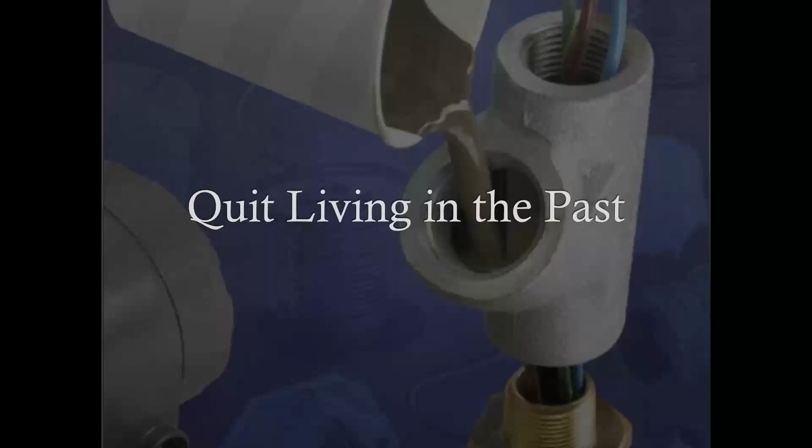So I'm sure some of you have seen what's on the monitor there before, which is what's called a poured seal. Poured seals have been around forever, and those are there to function in explosion-proof applications as gas blocks. And they're still around, they're still used tremendously, but we kind of consider them a thing of the past at Turck. We want you to move into the future of process wiring, which is the purpose of this presentation today, to convey what that future looks like and how it can potentially apply to your products or your applications or your equipment that you're manufacturing or having to support.

So moving on, what is process wiring? Process wiring are quick disconnect products designed specifically for the special need of process automation. And when I say process automation, that can be any kind of process. It could be manufacturing crude oil, or processing crude oil. It could be processing gas. It could be making pharmaceuticals or cosmetics. It can be a variety of different topics. So process wiring fits in all those markets. So hopefully one of those deals with what you're working with on a daily basis.

So the benefits of process wiring, it kind of came from the factory automation world. And anybody that's been in factory automation has dealt with probably M12 quick disconnects, or if you're used to Turck, we call them Eurofast. Those are plugs that make the speed and ease and cost of installation very low, because you can go deploy equipment very quickly on your pieces in the field. It's generally reconfigurable, which means you can unplug things, move it around, plug things back in, replace sensors very quickly. And most of the time it's mistake resistant.

And what we mean by that is, by using pluggable devices all the way from your control panel, it's really hard to mess up wiring. As long as you've got it landed on the right terminal block inside the control panel, you should be good to go 99.9% of the time. There's always that one outlying factor, but it does make it as close to mistake resistant as possible. When you take those attributes and you apply them to process automation, there's even more benefit to it.

A lot of times in process automation, you have to deal with frequent calibrations of equipment. There's maintenance. Things have to be pulled out and replaced and put back in, sometimes because of corrosive environments or things of that nature. A lot of times we're dealing with skids or modular construction. What that means is, let's say you're building a skid on site that has to connect to another. Well, you've got to break that down to ship it, because most times you can't fit one skid on a truck. So this allows you to plug and unplug those devices. So once you do get on site ready to deploy, everything plugs back together. You don't have to spend a lot of time rewiring.

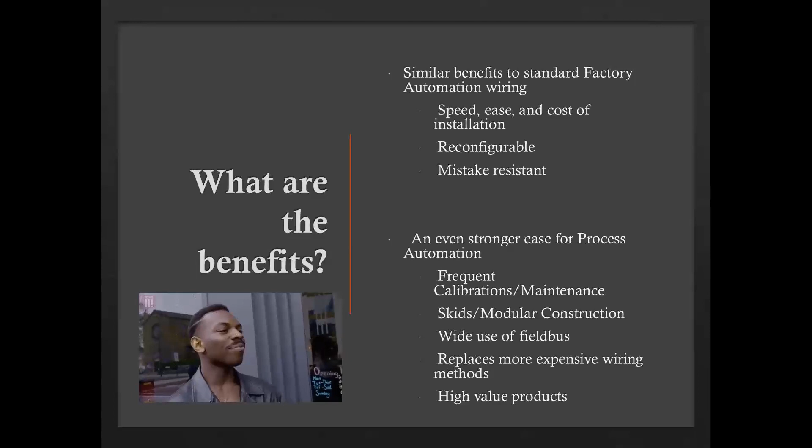Here's just an example of an application that we've had where frequent calibration came into play. This is actually from the Alaska pipeline, and it's an application on a LACT unit. And for those that aren't familiar, LACT is lease automatic custody transfer, or basically the cash register on an oil or a gas pipeline. Well, as you can imagine, that flow meter that's on there, it's got to be calibrated fairly often because people want the right amount of money for the product that they're producing.

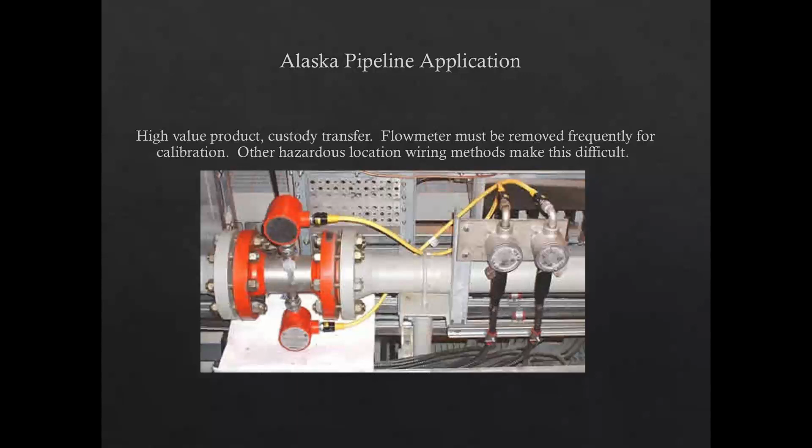Well, to go pull that multiple times, if you didn't use Turck process wiring, that means you have to go break a seal. There's a lot of mechanics involved to take that flow meter out, versus with process wiring, you simply go, make sure your circuit's disconnected, unplug it, put the new calibrated unit in, plug it back up, and you're up and running again. So your downtime is cut down considerably. So that's just a key example of where frequent calibration, your life can be made easy by using Turck process wiring.

So in our world, what are the challenges that make our world special? Obviously, harsh environments. This is a picture I found online. I'm assuming that's something in the... potentially just based on the amount of ice accumulation on the rails there. But that's the world that a lot of us live in, especially on the oil and gas side. Petrochem, you're dealing with events like Hurricane Laura that just came through in Louisiana. That's coming through and wrecking processes.

With Turck process wiring, you're able to get back up and going much, much quicker because of the sealed environment of the connectivity. Since it is pluggable, it's IP67 at a minimum, which means it can be in a meter of water for 30 minutes without any kind of water ingress. We've seen it much longer than that, but it does give you that protection. Obviously, chemical manufacturing has its challenges, pharmaceutical, which I just mentioned, and then water, wastewater, because we all know if water and wastewater isn't functioning, society is quickly going to go into a spiral. So it's key that that stays functioning.

Also, another challenge in our environment is people are wanting to run these networks, Foundation Fieldbus, Ethernet, things of that nature. Well, oftentimes shielding and very high level shielding is required because of the power that's being used by other pieces of equipment around it. So we're able to provide that extra shielding. And then also you've got NEC compliance that you have to adhere to, and then also hazardous areas that you have to take into consideration, Class 1 Div 2, Class 1 Div 1, even some zone ratings if you're going into Europe or throughout the world.

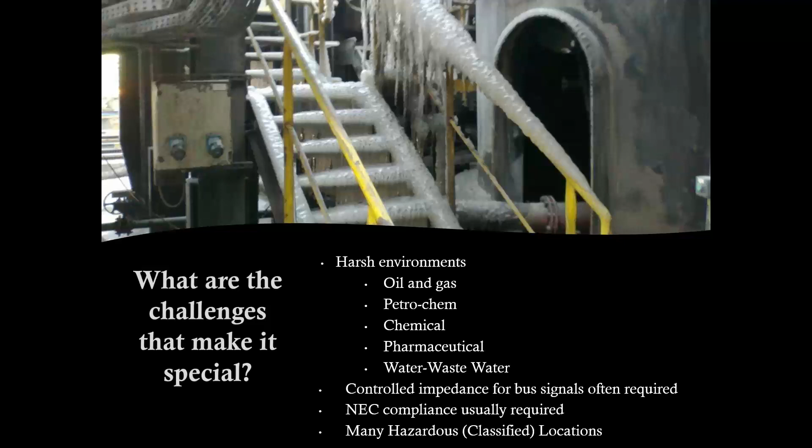So based on that, let's jump into a little bit of NEC. And as exciting as code is, it is important to talk about this. So NEC compliance for Class 1 Division 2 areas. So telling a little story, in 1996, the NEC... instrument tray cable, or you may have heard the term ITC before. Since 1996, they've actually expanded how you can use ITC cable as a Division 2 wiring method. So what Turck did is Turck took the concept of ITC cable, coupled it with our quick disconnect product offering, got certifications, and really revolutionized the wiring for hazardous areas.

So building on that, nearly all process installations are subject to the National Electrical Code. It's just the fact of the matter. Most of the time, circuits must be wired with approved methods. All wiring media has to be rated. Even the raw wire used in conduit has to be rated according to NEC. And circuits that aren't like a Class 2 circuit, and for those that aren't familiar, Class 2 means the circuit is power limited to 100 watts at 24 volt DC. Even circuits that aren't power limited have to use a 600 volt wiring medium. So what that means is even if you're running a 12 volt signal, if it's not a Class 2 circuit, you still have to use 600 volt wiring.

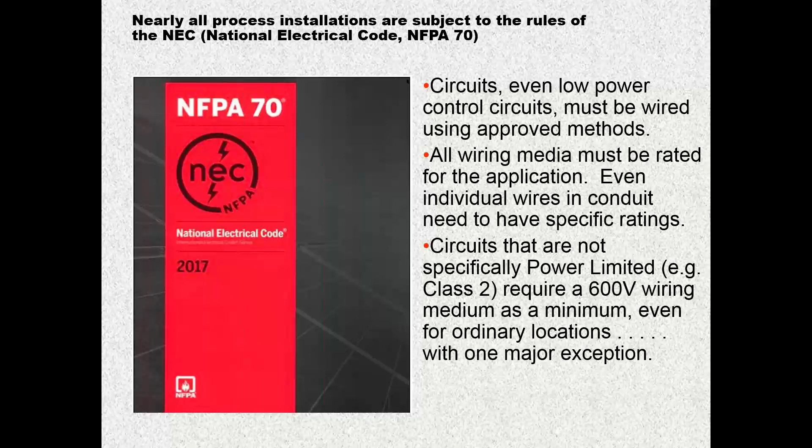Well, Turck, with our one major exception, and that's ITC cable. So what ITC cable is: wiring for instrumentation and control where circuits are less than 150 volts and 5 amps or less. I'm sorry, 5 amps or less of power being utilized.

They can be used in cable tray. ITC cable can be used in raceways. There's armored ITC cable, which we're going to talk about here in just a second. There's also what's called exposed run ITC cable. You may have seen it designated as ITC ER previously. What that cable allows you to do is actually drop out of your tray up to 50 feet down to a device or a switch or whatever it is you're trying to route down to.

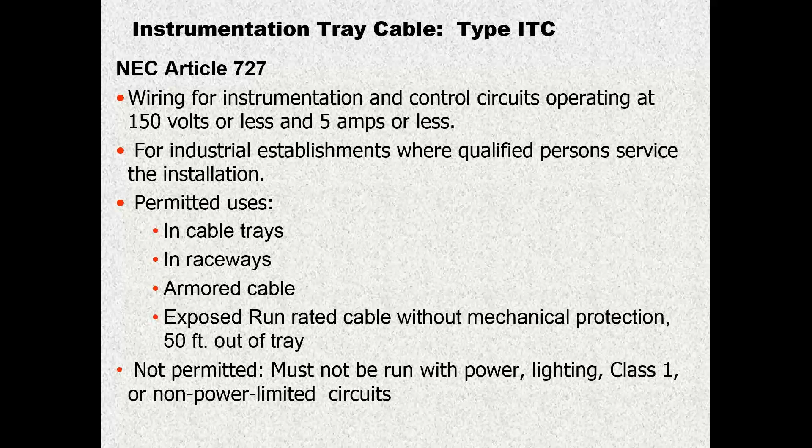The key caveat here is with ITC rated cable, you cannot run power circuits, you cannot run lighting. Caveat is with ITC cable, that is a requirement. So just looking here, here's the 3 examples, and we're going to delve into each one individually of the different types of ITC cable that's going to be available to you.

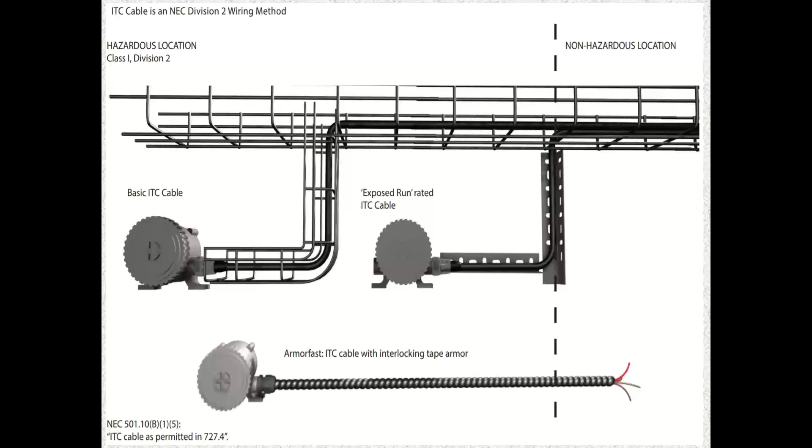The first is our standard ITC cable. This is going to be something where you have to run the cable in tray all the way down to your instrument or your device. It definitely makes life easier than having to run rigid conduit and deal with poured seals, obviously. But key is that tray does have to be taken all the way down to the instrument housing itself.

The next generation of that was what I mentioned, which was ITC ER rated cable. So with the ITC ER, now you can run it in tray, but then whenever you get ready to drop down to your transmitter, you can run it in some angle iron, something to mechanically protect the cable down to your transmitter. So it doesn't have to be tray. It can be other types of mechanical protection, and you can take that out up to 50 feet from the tray down to your transmitter or your device.

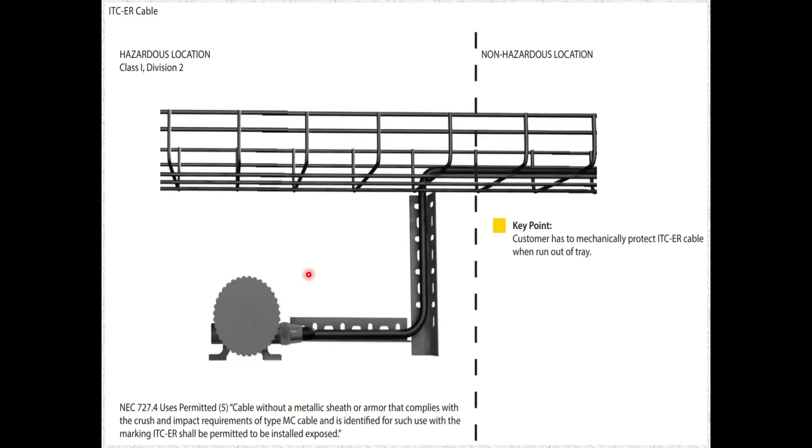And here's an example of what that could look like potentially within a process installation where you've got some angle iron run and it's tied off and supported every 6 feet down to the transmitter in that case.

Hey, Kurt. Yeah. I got a quick question here regarding ITC cable, and maybe you're going to get to this, but the question is, can we use 4 amps and 24 volt DC power with ITC cable? Yeah, in those situations you can, as long as it's under the 150 volt and the 5 amp regulation. So we have seen some applications where you'll have lower power actuators, for instance, where they'll need multiple wires going out to them, but they're very low power. So you can have the power on there plus your low power control signals as well.

Thank you. All right, I'll assume that was it. I'll move on.

So ITC ER cable is a very high spec cable. Basic ITC is still a premium cable. It's got more restrictions than the ER version, and most cables now, especially that Turck has to offer, are going to carry the ER rating on them as well. So within the ITC ER cable, the crush and impact resistance requirements are going to be extremely high and difficult to meet, especially for an unarmored cable.

But the testing they have to go through in order to get that ITC ER rated marking is that the cable is crushed 10 times between a flat plate and a 3/4 inch rod, and the average force to produce an electrical short must exceed 1,000 pounds. So a lot of times in my career, people are really worried about cables being stepped on. Well, using an ITC ER rated cable, that concern pretty much goes out the window.

We've even had applications where we've had ITC ER cables strung across a frac site and had skids actually sat on our multi-conductor panel. Didn't realize it, ran the frac job, lifted the skids off, coiled the cable back up, went to the next job, and it worked fine. So it's a very, very rugged cable.

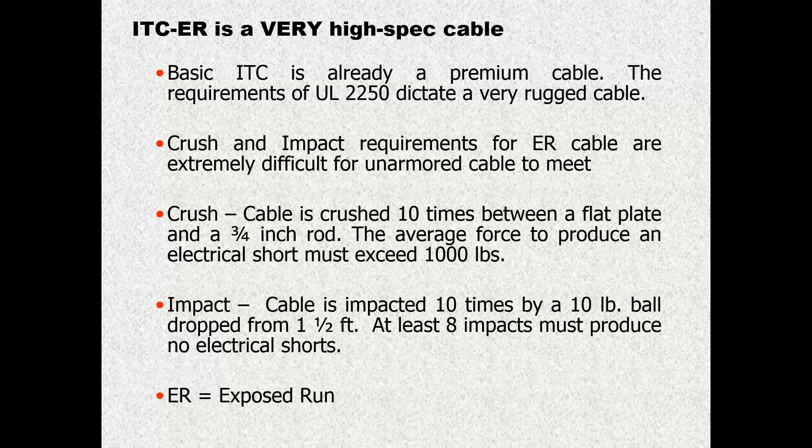For impact, it has to withstand a drop of a 10-pound ball 10 times from 1.5 feet. And out of those 10 times, at least 8 of those times, a short cannot be caused. So that just gives you an idea of the impact testing that it's got to go through as well. So a very rugged cable. But really, the biggest feature of this is it provides flexibility down to the last foot.

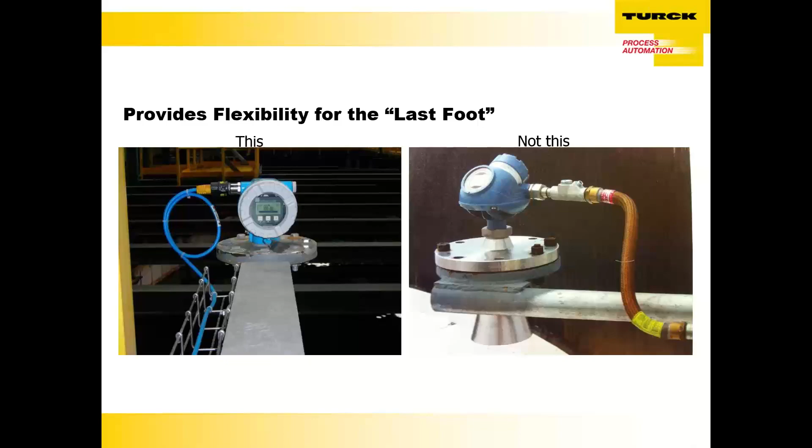So the one other type of ITC-ER cable we mentioned briefly was an armored version. The nice thing about the armored cable is you just have to mechanically support it every 6 feet out to your devices. Other than that, no tray requirements, no mechanical protection requirements. Obviously, you've got the armor on there. You just got to support it every 6 feet.

The one downfall to it is this cable can be very heavy, the more of it you have on a spool, for instance. The other thing is it's not really made to be spooled and unspooled, spooled and unspooled. So that can be an issue if you do have temporary installations on this guy. If you've got a fixed installation and you don't want to run tray or any kind of mechanical protection, this is definitely a viable option. We have a variety of different cord sets that have this type of mechanical protection in it also.

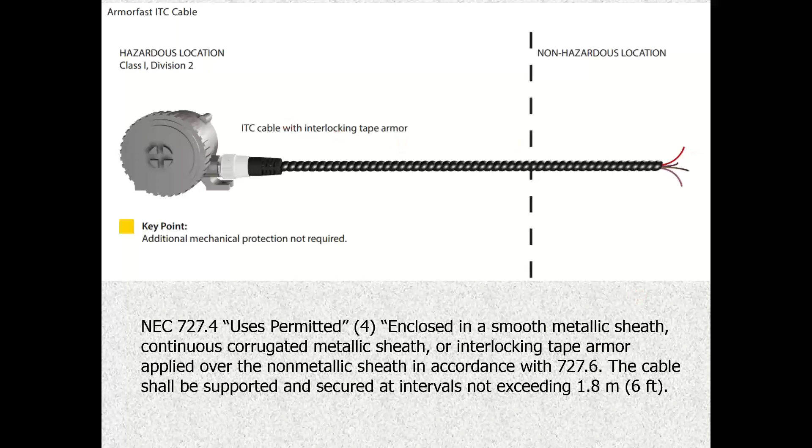So great, the ITC-ER cable is great. We've got a lot of different options, but we want to take it a step further. We want to go add what we call one of our receptacles to the device. So this is an example right here on the camera, if you can see it, of a 4-pin receptacle. It has a 1/2 inch NPT on the back of it. This is made to be added to a non-incendive transmitter or switch, whatever you may have out here. You're going to screw that guy in, and you're going to plug in your ITC cord set.

What this means now is if this guy has to be calibrated in the field, or has to be pulled out for a mechanical reason, whatever that may be, it's as simple as unplugging it, putting a new transmitter back on, plugging it back in. It does not take a certified electrician to go and swap these out now, be it in a pharmaceutical plant or even out on a wellhead. You can send anybody out there to swap those out for you.

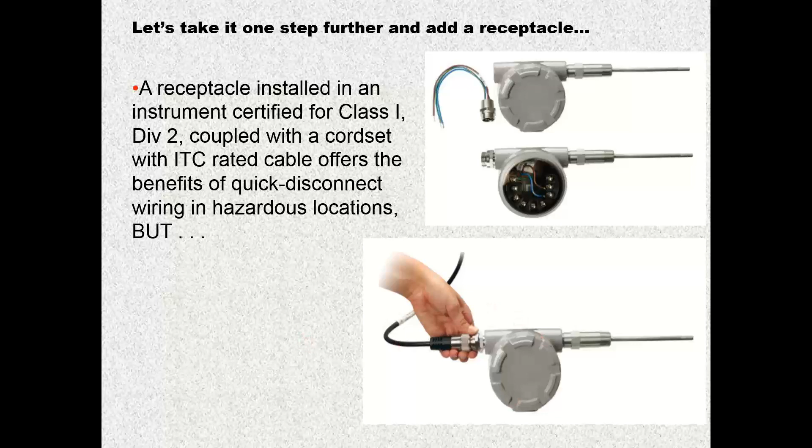The one key caveat is, for those that aren't aware, Class 1 Division 2 means a hazard should not be present under normal operating conditions. But what we all know is under non-normal operating conditions, a hazard could be present. Well, if you're allowed to simply disconnect this at any time as a hot circuit, you could potentially arc across those contacts. And if you did so, and gas just so happened to be present, you could have a major issue at that point. So what Turck has to keep that from happening is our LockFast device.

A tool to remove a protection device before unplugging has to be used in a Class 1 Div 2 area. So by adding this on and snapping it around the connector, it's there to force the technician to be reminded, hey, I need to go kill power to this circuit before I pop this guy off, right? And you can see on here, there's actually a label that shows it. And the LockFast is a very simple device. It's a clamshell. It's made to just go right there.

And one of the questions I always get is, hey, if I take this off, we're just going to find them in the dirt. We do offer these now with a lanyard on them. So you can go and add a lanyard behind this guy. So if this is taken off, it can hang from the transmitter while you're swapping or doing whatever it is you need to do, calibrating, whatever that may be.

Hey, Kurt. Yep. So quick question. Somebody was asking if the plug also works as a secondary seal from the process for temperature elements. Is that correct? We'll have to circle back on that one. I've never been asked that question. I guess I need a little more clarification. Can you notate down where the question came from, and we can dig back into that a little bit?

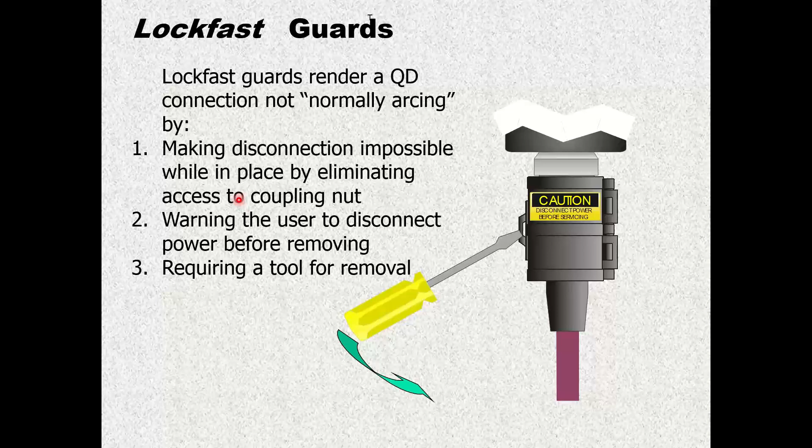All right, so just an example here of what a lock fast would look like. Again, it makes disconnection impossible on there, warns the user to disconnect power before removing. And you'll see actually from this next picture, here's an example of one right here. It says, caution, do not disconnect when circuit is live.

If you've got your readers on or your glasses, you can actually see right here, we reference our FM control drawings specific to that. So where that's key is if you get an inspector in your plant or on your well site, and they're saying, well, I've never seen this stuff before, not sure how it works, if you're meeting code. This references directly to our control drawing, which shows how these can be implemented in the hazardous area in a safe manner. So you do have that protection there for you as well.

If you need help finding that certification documentation, please contact your local distributor or Automated Dynamics guy, and we can help you find that documentation.

Quick disconnect solution from Turck is, being that this is a molded connection over here, you do not need a boundary seal now when transferring from a Class 1 Division 2 area into a non-hazardous location. So where that's beneficial is, typically in the past, you would have to have a poured seal here at your transmitter housing to keep gas migration from going into the transmitter. You would also have to have a boundary seal here going into the non-hazardous location to keep gas from flowing potentially into your main control.

Sheathed cable and a molded body here, that is no longer required. So that's just another added benefit to using Turck's system and cut down on the amount of labor that it takes to have installations stay up and going.

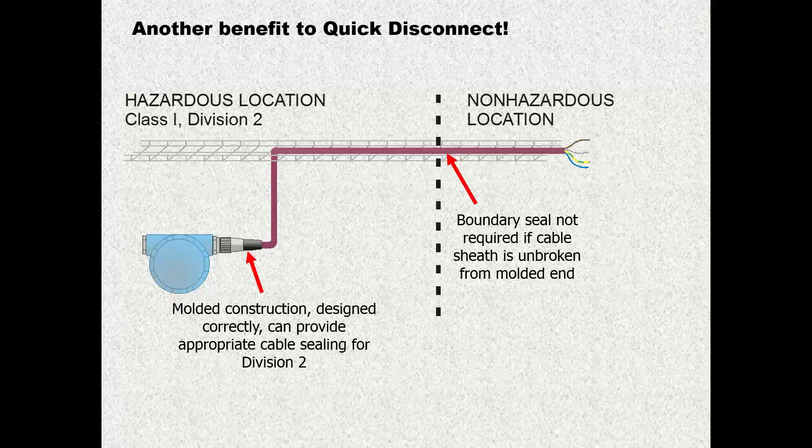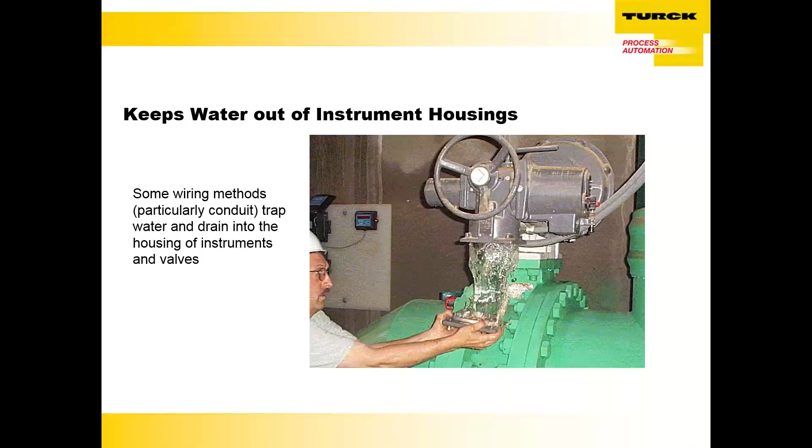So we've actually taken it one step further, and I know we're on to probably step 7 now from what I've said. I guess I've introduced what we call an explosion-proof feed-through. So this is actually made for transmitters, or switches, that get their rating for Class 1 Division 2 by being an explosion-proof device. So you've got two different types. You've got a non-incendive type transmitter, which doesn't require this type of receptacle. It can use one of our standards. Or you have an explosion-proof transmitter or switch where the housing is what gives it its approval for the hazard.

A receptacle that's potted to the point to be able to withstand the pressure from a potential explosion within your transmitter housing. And then as that explosion occurs and the gases are outgassed out the housing, it cools as it goes across the threads leaving the housing. So the key from this is it's not an explosion-proof connector. This does not allow you to disconnect hot still. You still have to kill power to the circuit before you unplug these transmitters. The key is it seals up your explosion-proof housing to retain the EX rating in that Class 1 Division 2 area, but now it is considered pluggable. Okay, so hopefully that makes sense. If not, we can get back into the weeds on it and hook up with one of your local guys. But it is made to seal up and keep your explosion-proof device.

Hey, Kurt? Yep. Got a question here about, does it provide H2O intrusion protection? Which I believe that's a yes. On the threads or on the actual connector portion itself? How about both? Yeah, it should. I mean, obviously on the connector portion where the plug is occurring from the cord set, yes, it does. As long as you seal your housing up correctly, just like you would with an EX plug or anything on the other ports, yes, it will provide that protection. Thank you.

And somebody's asking here, and I think the answer is yes, that what you're talking about right now with the explosion proof, that's what's called out by the EX in the receptacle part number, correct? 100%. Yep, that is exactly right. If you have one of our receptacles and it has an EX in the part number, it is one of the explosion proof feed throughs.

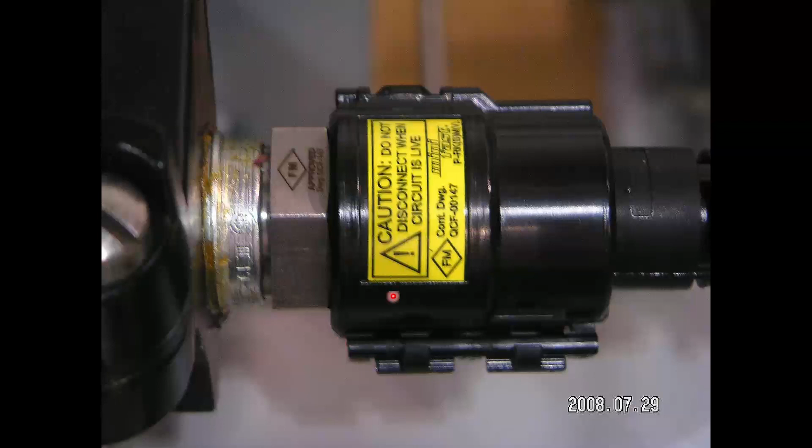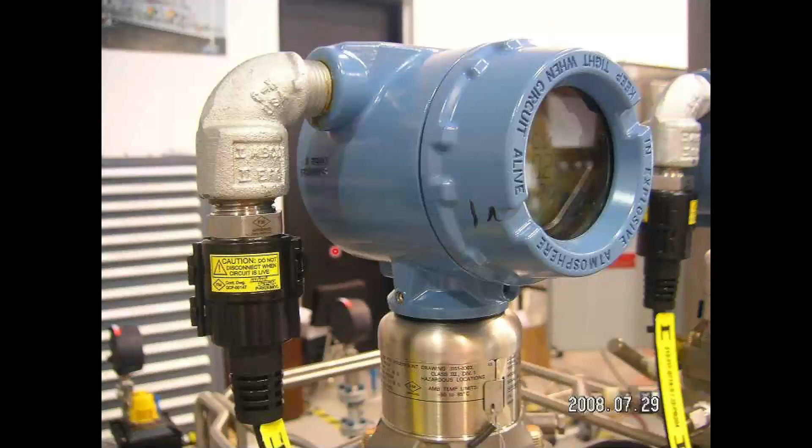And here's another example of it. This is an older picture from 2008. They put this elbow here. We do have right angle cord sets now that can plug this in and eliminate the need to put this elbow on there, just for your knowledge. Some of the applications, as I mentioned, explosion-proof limit switches, you can now make these pluggable. Limit switches wear out. It's just the nature of the beast. They do. They're mechanical. Very easy. Your transmitters, as we talked about.

And then one thing I've actually done with a few customers is they've got a NEMA 7 box, which is explosion-proof, but they'll have IS barriers inside here. Well, for those that are familiar with intrinsic safety, it's power limited. So those circuits can be plugged and unplugged hot, because even if you arc across the contacts when you plug or unplug, there's not enough power there to blow the atmosphere.

So what they'll do is they'll have a NEMA 7 box, IS barriers inside here, and then you now make those IS circuits pluggable. So again, a quick way, instead of having to have a bunch of glands on the bottom of here, and then you got to coil a bunch of cable up, you don't have to do that anymore. Now these can be pluggable if you're using intrinsic safety. And if you'd like more information on intrinsic safety, that is going to be one of the questions in the survey, as another topic for us to present on.

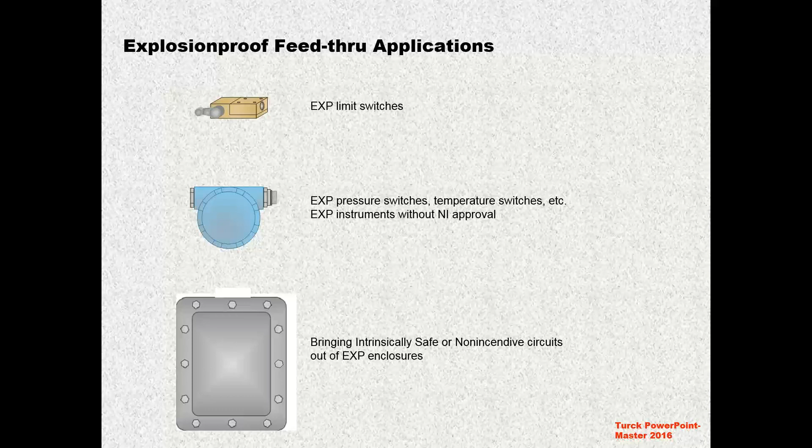Hey, Kurt, quick question. Yep. Yeah, so kind of back to, I think, even using the lock fast, there's a question about the need to kill power. The question is, if a person were to verify the area is safe and no hazards are present, it could then be unplugged in a Class 1 Div 2 area without shutting off the power. Is that correct?

That's going to be more at the discretion of the producer or the operator at that point. All of our documentation calls out killing power to the circuit, and all of the verbiage that we call out has to do with disconnecting power to the circuit. So if you wanted to stay within the realm of the Turck documentation, you know, if that producer or operator wants to make the choice to allow for a sniff of the area, that'd be up to them. Got it.

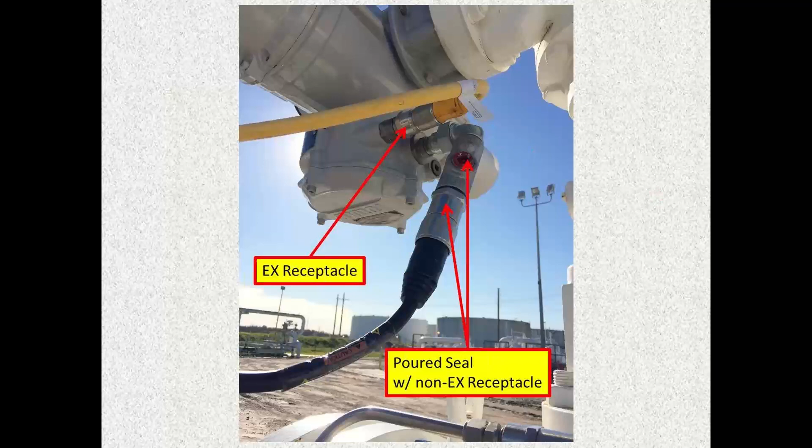And then just here's an example of old and new technology. So the older poured seals versions versus using Turck's connectivity. You can see mechanically much smaller footprint, so potentially smaller panels depending on what you're wanting to accomplish. So for those that aren't familiar with our product offering, these are Class 1 division.

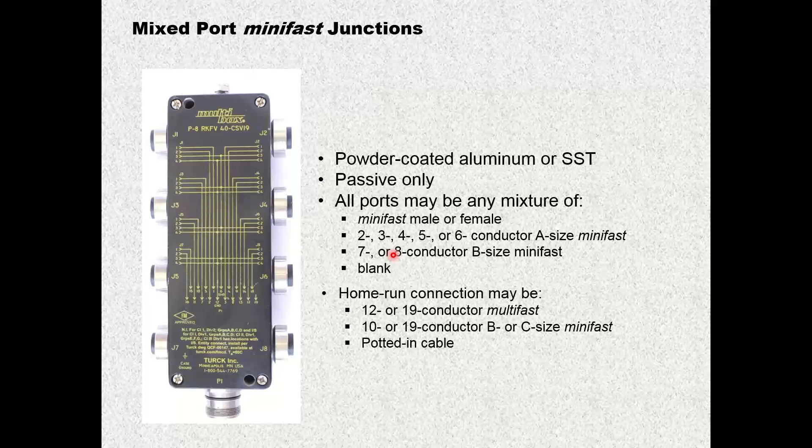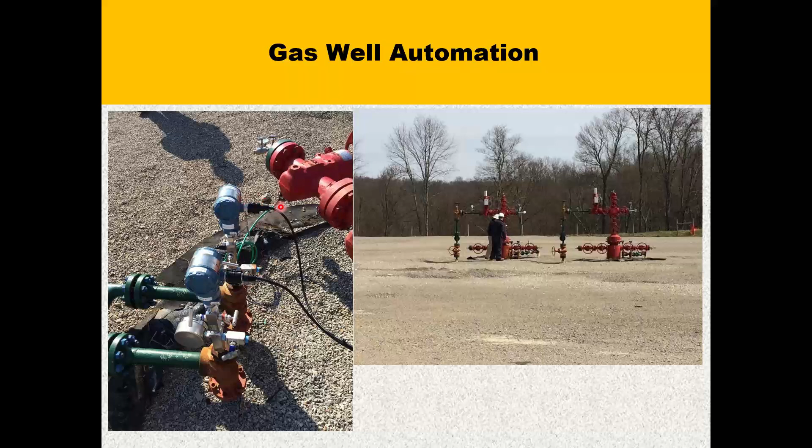This is some gas well automation that we've seen. So you can see over here, we've got a couple of pressure transmitters where we're picking up values. They've got 4-pin cables on those that are running back to a brick on these guys. So in this case, they're using 5 of the 8 ports. You can see the caps that are on here closing off the others. They do come with plastic caps in the box. If you want to add metal, you can. But you can see back to your main RTU or whatever it may be on the side of the well pad.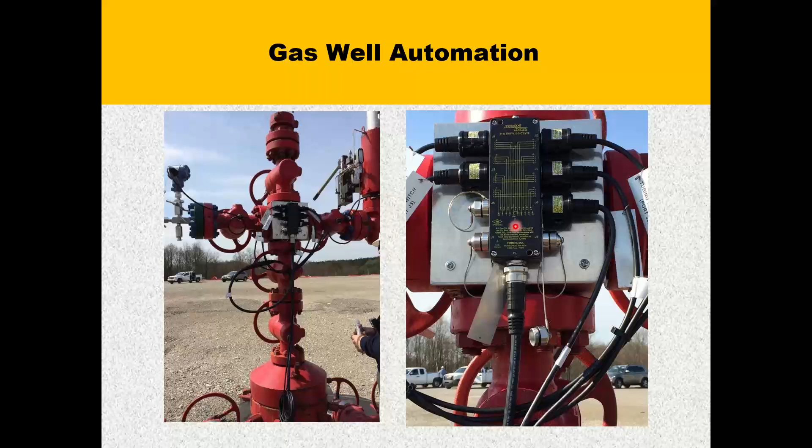Here's another example of what was done on a wellhead where they had multiple devices. Again, plunger arrival, pressure. I believe even the ESD was wired into these guys. And this is a little bit unique and a little outside the box, because what was happening is workover rigs were coming in and pulling this wellhead, and they were just cutting all the cables and throwing it to the side. And so whenever they had to go reassemble the well, it took a...

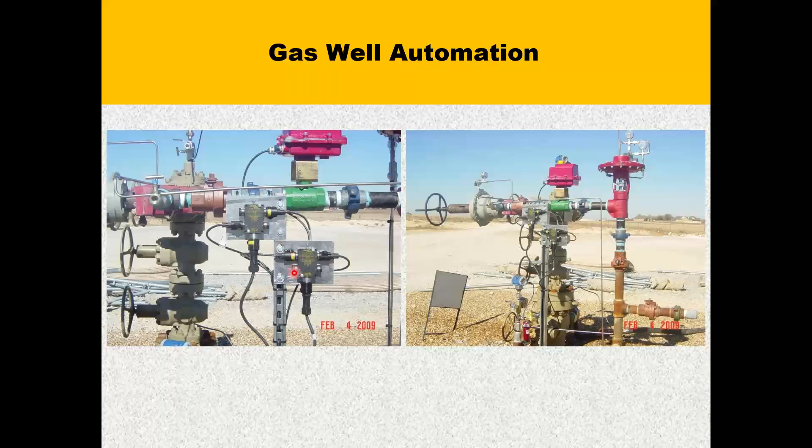Now there's magnets on these junction bricks and this steel plate. So whenever they go to work over the well, they simply pull these bricks off, unplug everything, work it over, and then to reassemble, they just mechanically mount everything, plug everything back in, and they're up and going. So just a quick way to get these junction boxes out of the way and then get them back up on the wellhead.

Hey, Kurt. Yeah. A quick question, I guess, back on the junction boxes. If you've got those closure caps on there, do they need to have any kind of a snap lock on them? I guess that all depends if there's power on those pins or something. Yeah, the only time you have to have it is whenever you're disconnecting on these guys. As you're pulling that out, you can see you've got your male pins on your receptacle and then your female contacts. Well, whenever that's disconnecting and you're taking those contacts apart, that's where you could potentially arc. On the closure caps, they're just screwed over the overall housing, so there's no contact with the live pins on that. So no, you don't have to have anything on those.

Perfect, thank you. So what we've got here, this picture is actually the bottom of a control panel. They've actually got a bulkhead plate, 2-pin home run bulkheads mounted. Slapped this on the bottom, wired it up internally, and then now all their home run cables from their junction bricks just plug directly in. So again, just ways to speed things up, ways to make life simpler when it comes to wiring of control signals, because as things progress, people want more and more information. They want more and more process values. So this is just a very simple way to help give them that without just adding a multitude of wires to your panel.

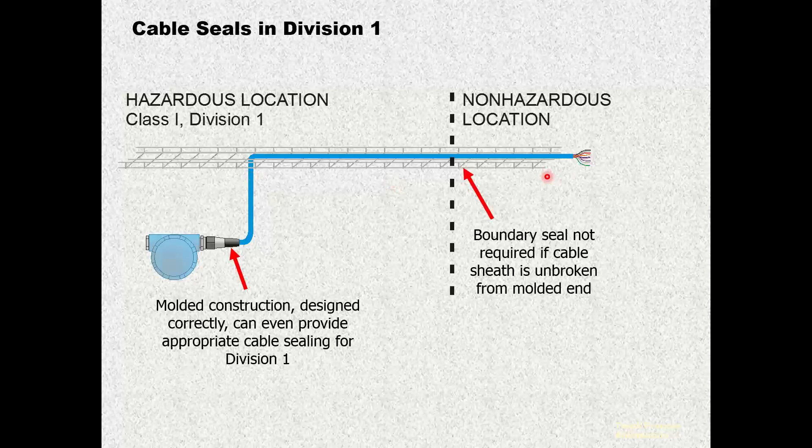So one of the other benefits to this guy is in a Class 1 Div 1 area, which is what we're showing here, as long as you're going intrinsic safety, right? You don't need a boundary seal going from a Class 1 Div 1 area to a non-hazardous location. So the benefit there is you're going from where a hazard is always present because it's Div 1 to an area where there should not ever be anything, and you don't have to do anything special to traverse from one to the other. So that's what this is showing.

And as I mentioned, if you're using IS circuits, you can use our multi-port bricks. So now you can gather in your proxes, pressure transmitters, temperature values if you're using RTDs, and take those back to IS barriers on this side. So now you can go into the Class 1 Div 1 area and still have the same wiring process.

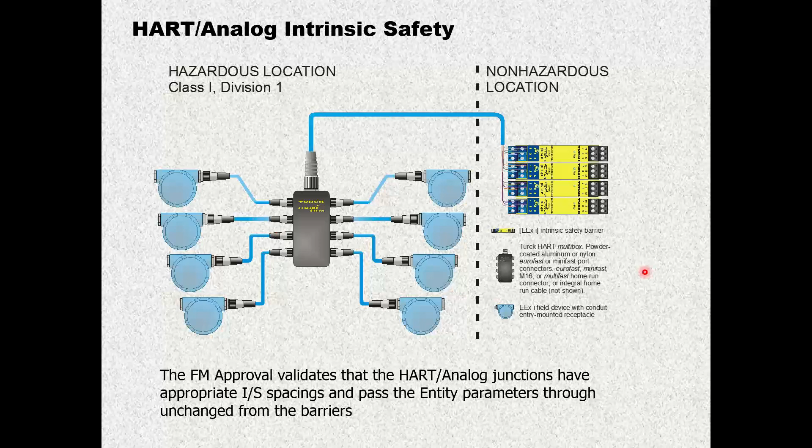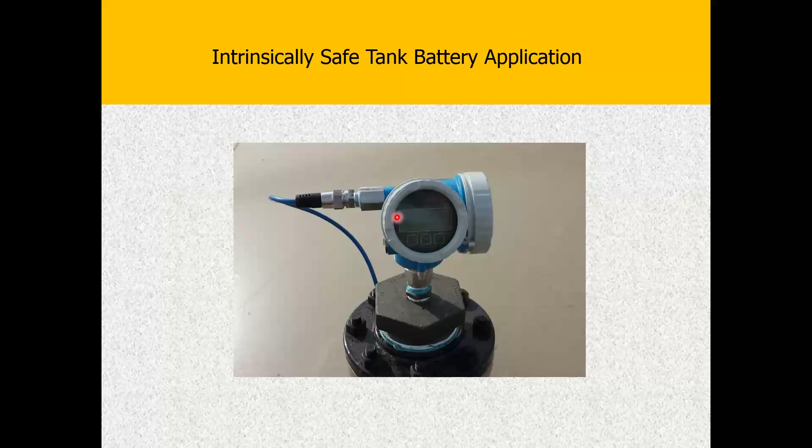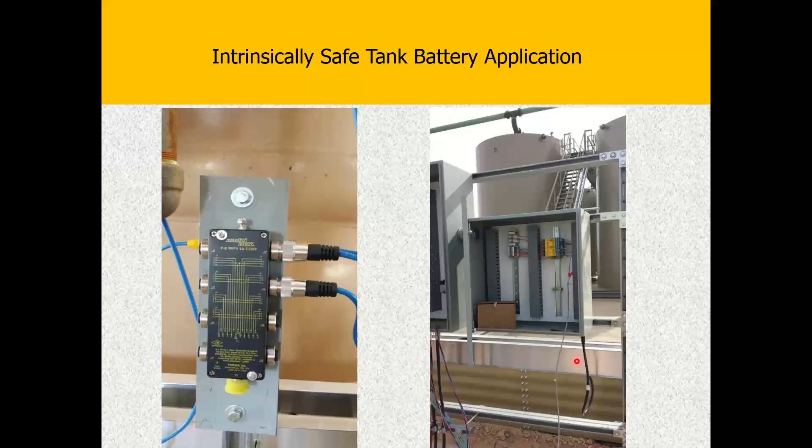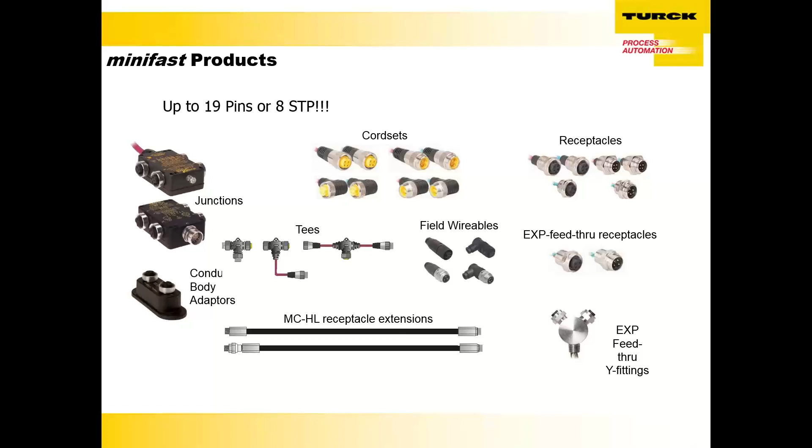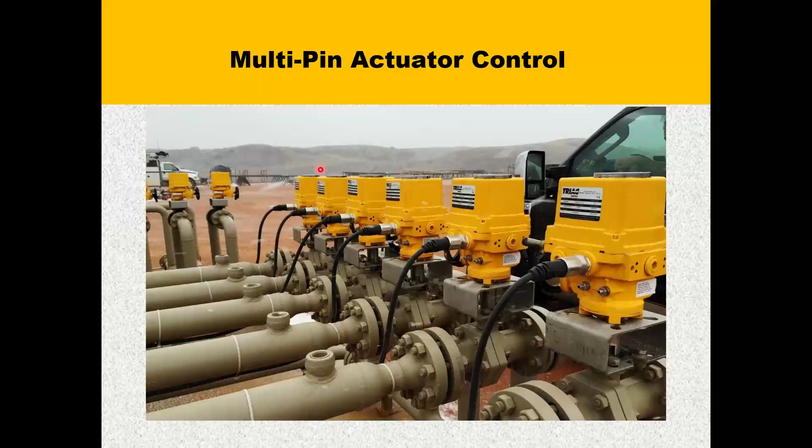This is just a bank or a battery of actuators where they're using some multi-pin Turck receptacles on there for control and power, turning these guys. But this is the beauty of it: this panel showed up on site, all of these actuators pre-wired on there, so all they had to do once it's mechanically mounted is plug and play, and they were off to the races.

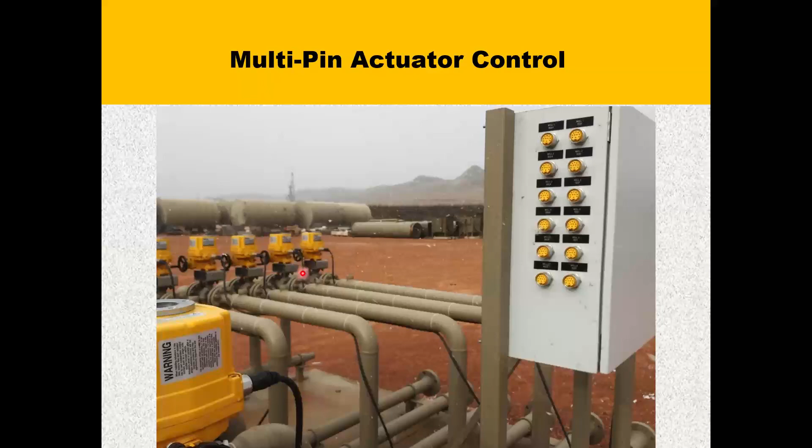Contradicting myself here just a little bit, and if my wife was on here, she'd say I do it all the time, but we do have a power option. I know previously I said you can't run power circuits, and that was true because that was for instrument tray cable, which is designed for instruments. This is what we call our Powerfast offering.

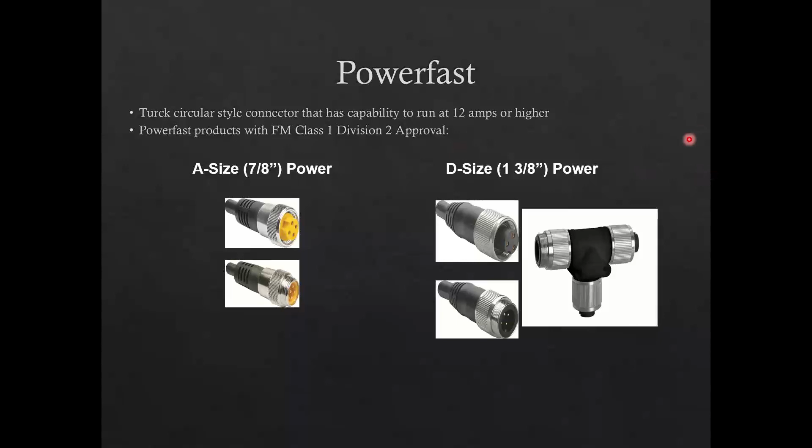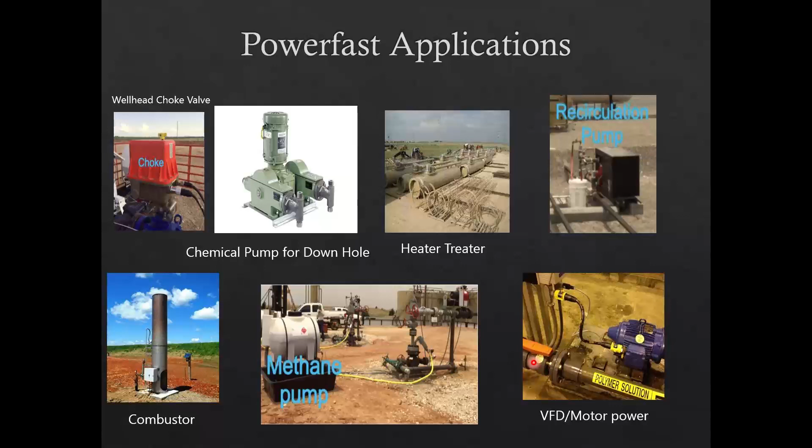These are for power applications, and we use what's called tray cable, not instrument tray cable, but just tray cable in this case. We're going to have an A-size power, which is going to be similar to our A-size signal connectivity. Then we're going to have a D-size, which is actually 1 3/8 on this. Some typical applications for Powerfast are going to be on some choke valves, a lot of different pump applications, even if you got explosion-proof motors and VFD connections. I'm going to show you something unique here in just a second that you can use for that application.

But on our A size, you can get up to a 14 gauge, up to 15 amps, 600 volts, tray rated ER. So tray rated cable, exposed run on these guys. It's going to carry a Class 1 Division 2 approval on it. You can do nickel, brass, or stainless.

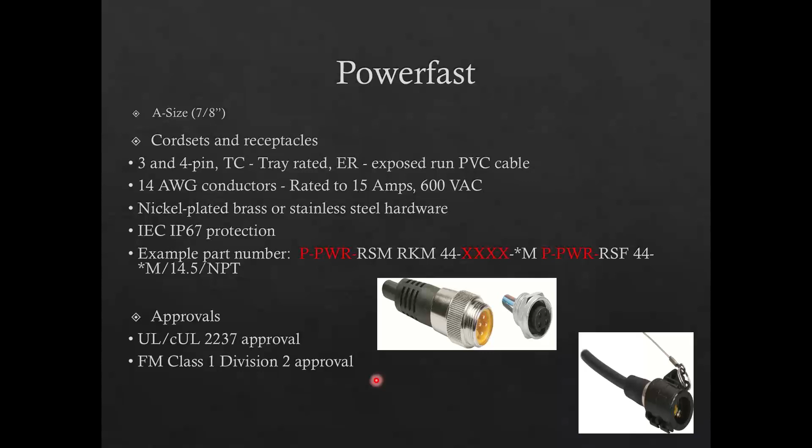And then we'll bump to our D size after that, which is our 1 3/8 size. This guy, if you go to our 3-pin 10 gauge, you can actually get up to 30 amps across that line in a Class 1 Div 2 area. Nickel, brass, aluminum, or stainless, depending on the connector. I typically don't recommend aluminum just because it's soft. Stainless is where we live most of the time.

You can see your approvals for sealing on this guy. We do T's for it. Where these T's are nice is if you've got a bus of power and you want to drop off to different motors, maybe you've got some low power DC motors that you want to run off of these guys, like on a conveyor system in a hazardous area, you can do something like that. And again, these are going to have the lock fast just like anything else. To remind you, you'll definitely need to go kill power to that circuit before removing.

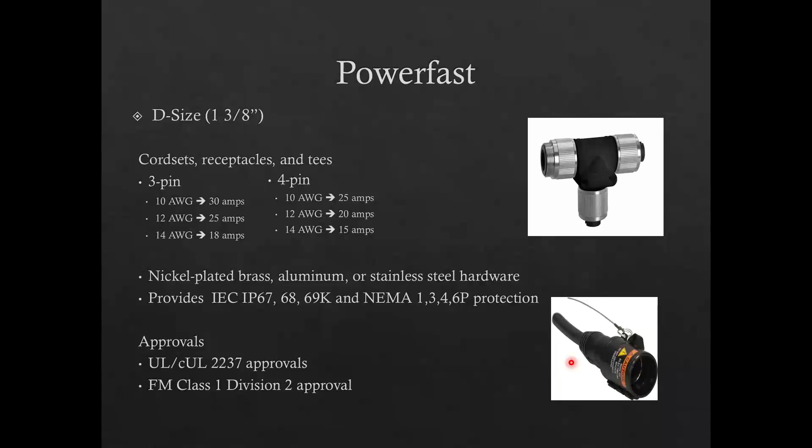Here's an example of where it's used on a Rotork actuator where it exceeded the amperage limitations of our standard cabling. You're going to have your power connection here for your actuators. A lot of times these are going to be 3/4 inch NPT, which we can completely support. And then you've got your signal connection over here on the other port. So your open and close commands, your feedback for open and closed on this cable. This is a very prevalent application that we've run into more and more because of the ease of wiring on these guys, especially in the Div 2 area.

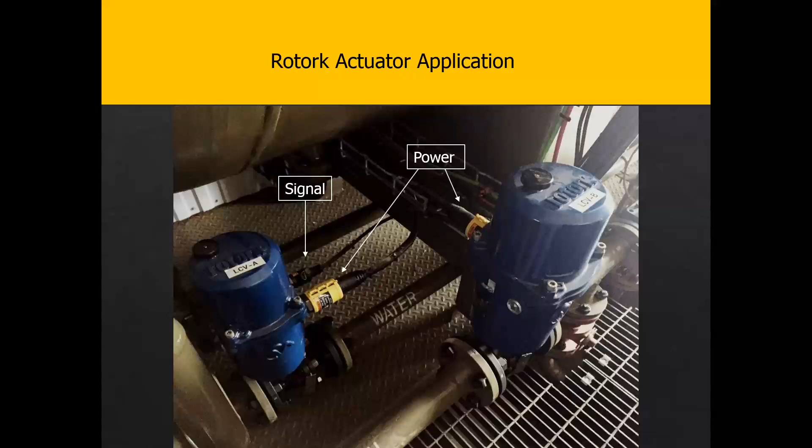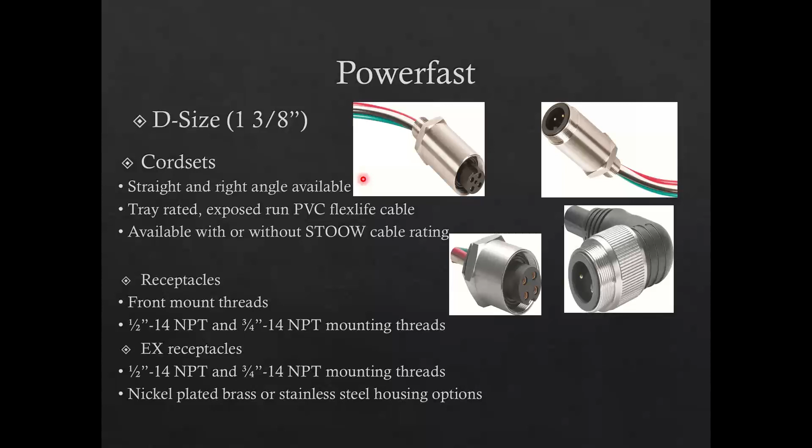So you can see for our cord sets, we can even do a right angle on the D size. The other unique thing for the D size as well is we can do explosion proof feed through versions, just like on our signal connectivity. So now you've got an explosion proof motor that's got to be pulled out periodically to have the bearings done. You're in a corrosive environment, it's going to have to be pulled out every once in a while. Now you can make those motors pluggable as long as they're below 30 amps and make that swap out very easy and get your process back up and going very quick.

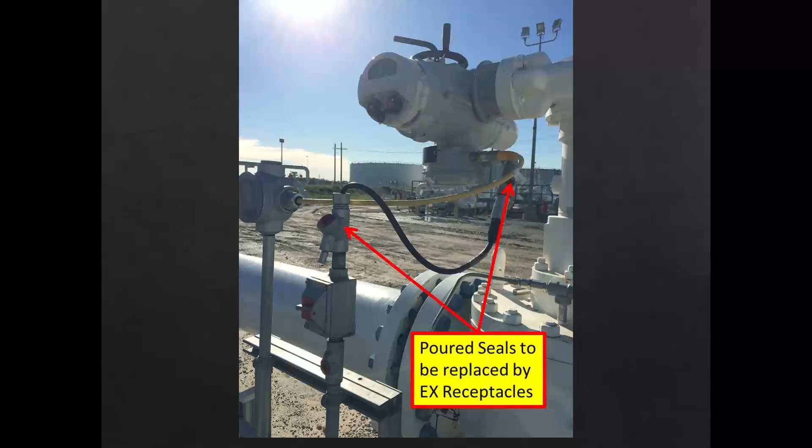A product that I wanted to make sure and point out to y'all that's now Class 1 Div 2 approved: a lot of times we run into solenoid applications where the solenoid is going to have an internal thread of like a 1/2 inch, and then there's going to be a couple wires coming out because this thing's Class 1 Div 2, so it's totally potted. Previously, if you wanted to make these pluggable, you'd have to add a conduit housing and then add a receptacle, butt splice them. Just a pain.

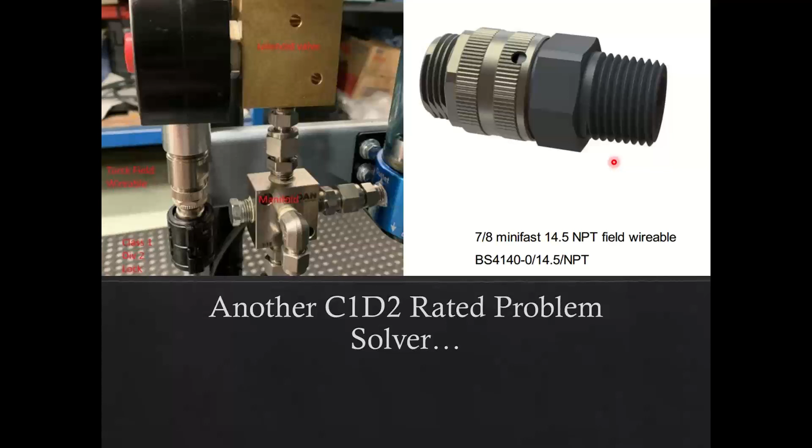Well, now Turck's come out with this guy where this back portion can be threaded into the solenoid housing. You pull the wires through that guy and then land them on this field wireable. So now this has become a pluggable item. Very simply, you got rid of the conduit body and all that extra labor. It's a way to make solenoids quick disconnect, and even some limit switches that are potted, quick disconnect very easily.

Another issue that Turck confronted that we developed product for is the ability to make a quick disconnect in a C1D2 area. This is actually going to be a thermocouple receptacle with all the necessary wiring parameters for thermocouple wiring, no dissimilar metals.

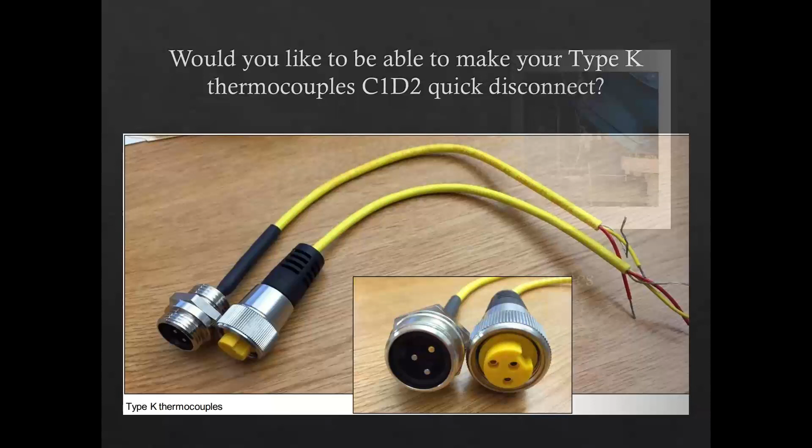This is some of them installed, so you can see you've got your traditional housing here with your thermocouple going in. Normally in the past, you'd have to run thermocouple wire into this guy through a gland or something along those lines, land it on the terminal strip. Well, now with our receptacles, you can screw that into that 1/2 inch NPT, land them on the terminals, and now these are pluggable items. So this makes swap out of those very easy.

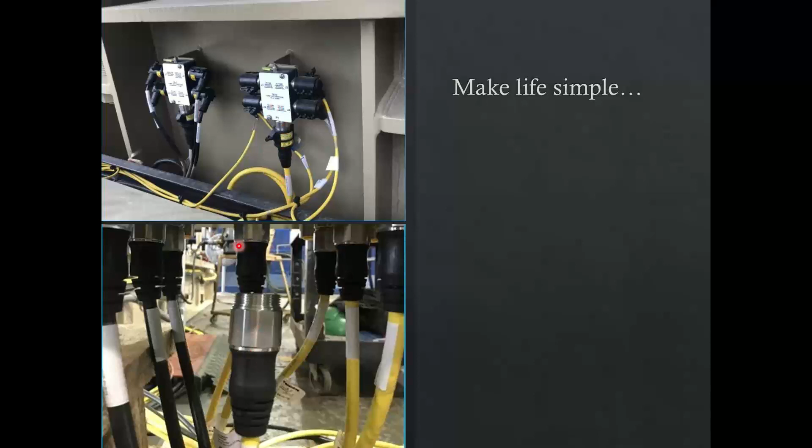And again, I'm a simple man. We like to make life simple. This shows a 4-port. You can actually take in up to 5 different thermocouples into one of these guys, run that back to your main control panel, and plug those in. That's all it takes.

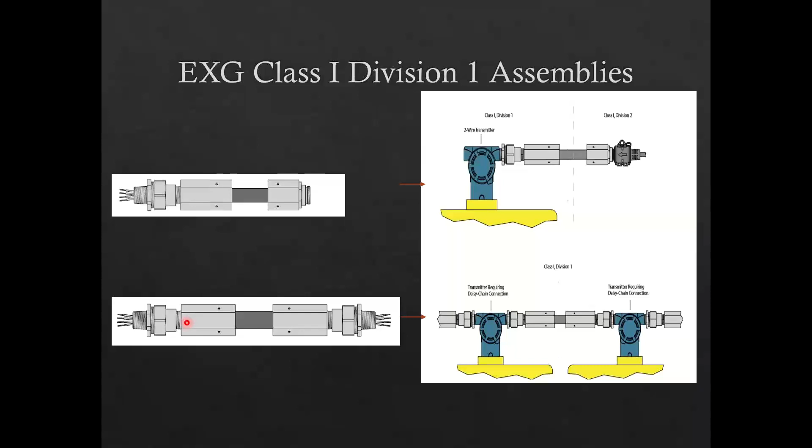If you've ever seen an Okonite cable that's got the corrugated metal all the way around it, this was an MCHL cable. This was the type of cable that you had to use in a Class 1 Div 1 area. It's very tough to work with. It doesn't bend well. If you cut it, it's very sharp when you're working with it. So Turck developed a cable that meets the same specs that's non-armored. So this is that cable, and you can see the pliability of this guy now in a Class 1 Div 1 area.

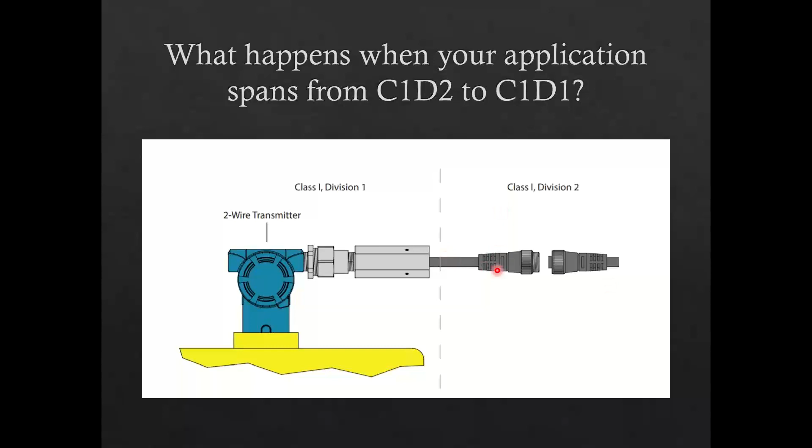So you can do a couple different things. You can either extend from a Class 1 Division 2 into a Class 1 Division 1 area. This is a poured seal that we've already done for you. This is a rotary union that screws in here. So now you can screw that into your transmitter, wire it up. We build this as long as you want to extend into the Class 1 Div 2 area, and then you use our standard connectivity at that point to extend back to your control panel.

The other option with this is if you want to go, for instance, from transmitter to transmitter or explosion-proof housing to explosion-proof housing, we can provide it with 2 poured seals on it. We build the cable in between as long as you want, and then it's got the 2 rotary unions on this guy as well. So a Class 1 Division 1 wiring method that's not your traditional Okonite, you know, go beat your head against the wall trying to bend the stuff and get it where you want it to go. We can make it very easy.

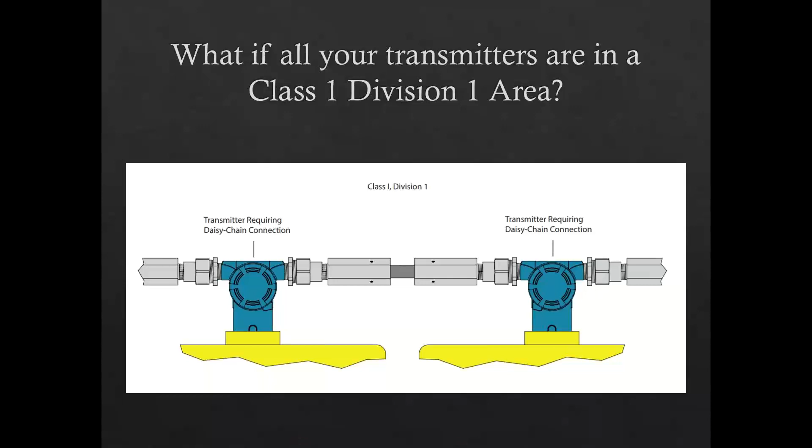The key to it is, find my mouse here. If you read it for an NEC Zone 1, 505, it allows it without any kind of special restriction to use that cable. For NEC 500, which is going to be the Division 1 certification, it calls out where flexibility is required. Again, that's NEC being a little vague. So if there's a reason you need this pliability for your installation, then according to NEC, you're good in the Class 1 Division 1 area. Just want to make sure and point that out.

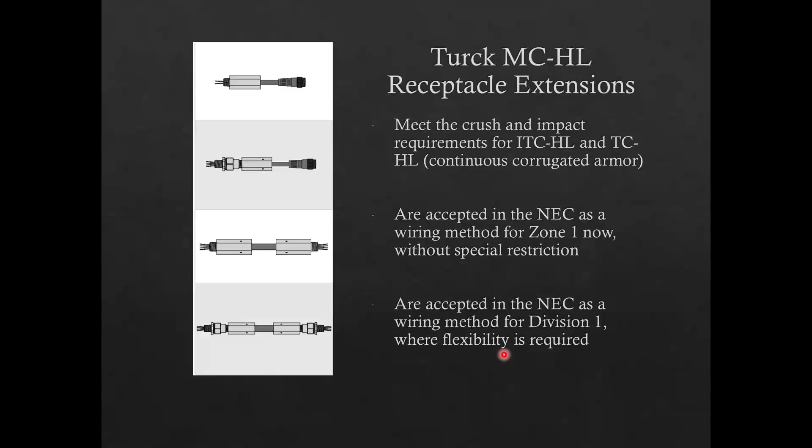There's a tank battery application that we've done with this. This is a legacy product of the same family. You can see it used to have the corrugated armor on it. We've done away with that now. But it's a tank battery application where we're gathering in multiple signals. In this case, they're wired to a Vega transmitter on top of the tank. This is a Class 1 Div 1 area.

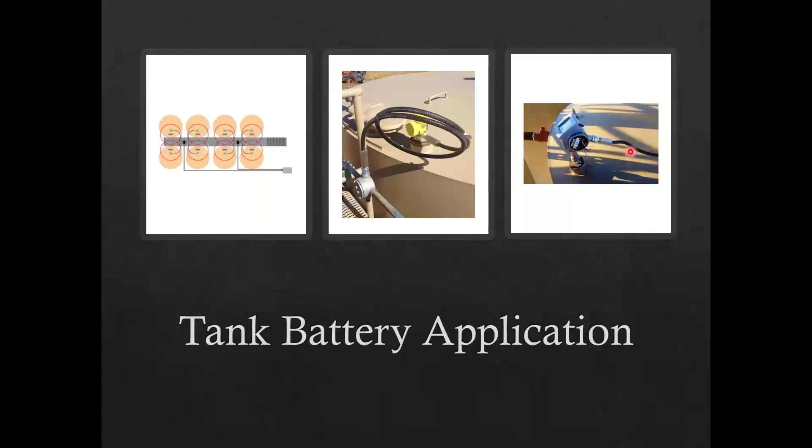It's an explosion-proof Vega. You've got your rotary union portion going over to the railway, wired into conduit. That's how they chose to do this installation. In this case, you've got another transmitter on top. They're actually wiring on. At that point, they're going to one of our junction bricks and using standard Class 1 Div 2 wiring down to the bottom of the tank battery.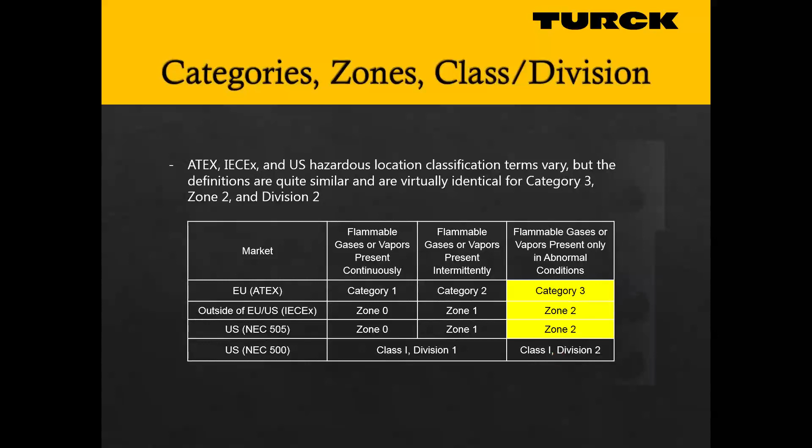So the reason I bring this up is if you're building equipment that's got to have a global certification on it, we have that now with this product. You can do 2 up to 19 pins on this guy. We only have them in a straight style. We don't have them in a right angle, and they're all going to be unshielded. It can be shielded cable, and the shield can be tied to a pin, but the shield cannot be tied to the coupling nut on this guy.

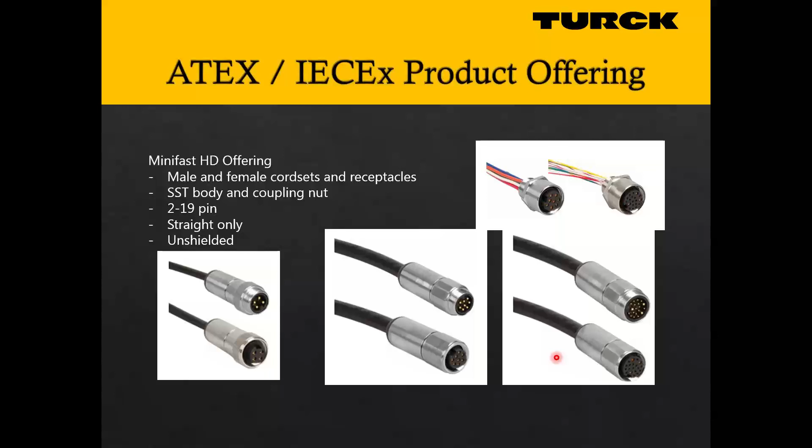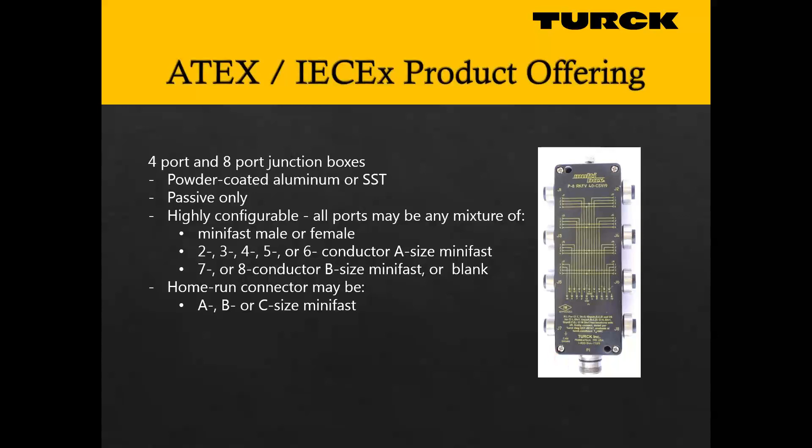We're going to have all the same types of junction boxes that we have available for our standard C1D2 product. We're going to be able to do in this Zone 2 rated product as well. And you're going to use the same Lockfast as you've used traditionally. Now our Lockfast have all the approvals printed on the label.

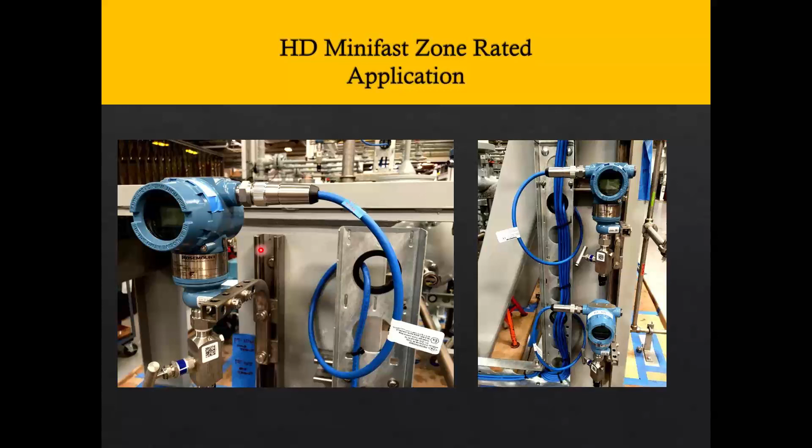So all that being said, this is the wrap up to it. In order for Turck to be able to meet all these approvals, we had to develop a cable that could go global. So that's why we developed our Extremelife-60 cable, which we call our super cable. It's going to be approved for Div 2, Zone 2. It's going to carry some offshore approvals, -60 cold bend and -40 cold impact, which I'll tell you, I don't want to be in either one of those, but if your cable resides in those areas, this cable is going to be rated for it.

It's going to have superior strength, crush and impact resistance. But the key is, for us to meet all these global approvals, we had to meet some serious flame retardancy guidelines. FT4 being one, but the key is this IEC 60332-3-22 spec. And this is what that flame test looks like. It's a 40-minute flame test that we had to go through and pass to be able to say we can work in Zone 2 areas.

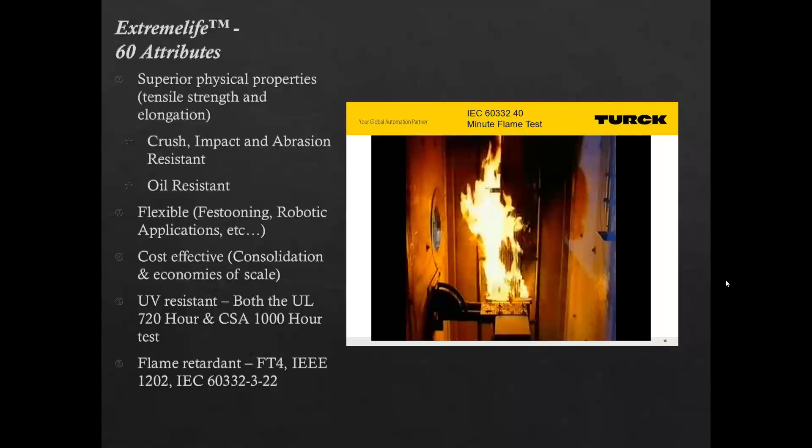So it's hard to see, but this is actually the cable internally that's being burned for 40 minutes. And I was talking to my counterpart, Drew. He was saying this is actually about a 10-foot flame. So it's a very stringent, very strict test that we had to go through to get that cert.

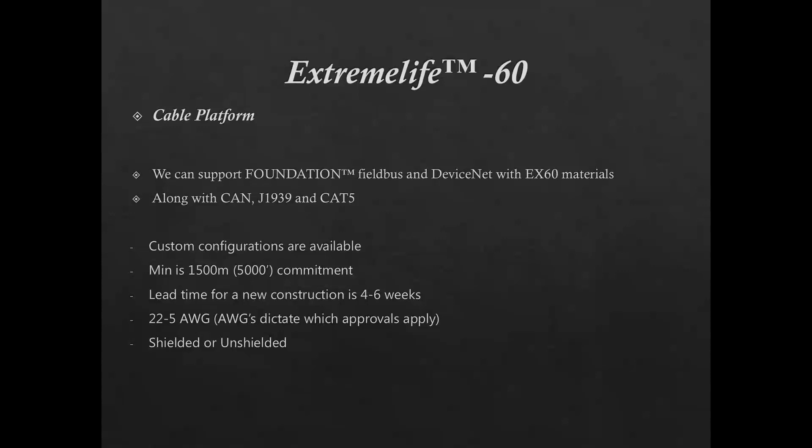On this platform, we can support networks. So we can do Cat5. We can do J1939 application. We have some of these already created. If not, we can create customs as well. If you like the properties of the cable, 1,500 meter minimum, we can go create that specifically for you.

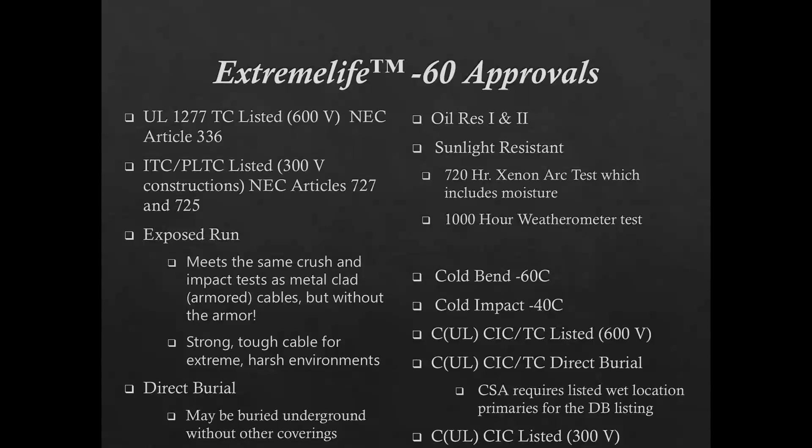Hey, Kurt. Yeah. We got a question here. Okay. Why do we need seals on the connector if the transmitters are intrinsically safe?

So if you have an intrinsically safe transmitter, and I assume you're talking about the seal like a boundary seal, where that would traditionally come from is if you were using conduit, for instance, even if your device was intrinsically safe, you've essentially got a pipe from the hazardous area. If you don't have a seal, that means that gas could flow into the non-hazardous area through your conduit. And then if you've got a contactor or some kind of arcing device within that control panel, if you get enough gas accumulation within it, that could explode at that point.

So the reason you need a seal is to keep the gas migration potentially from inside the conduit into the safe area. So with Turck, by using the molded connectors, you have the seal already at the cord set, because as long as it hasn't been penetrated somehow by being cut or something along those lines, it's completely sealed so that gas cannot pass into the safe area from the Division 1 area where your IS device will be located. Does that make sense?

Yes, did to me. Thank you. And again, on any of these points, if you need further clarification, feel free to reach out to any of us, please. So I guess there was a follow-up that if we're not using conduit, gas cannot pass. Connectorized system like ours, correct, the gas will not migrate through the cable. Got it.